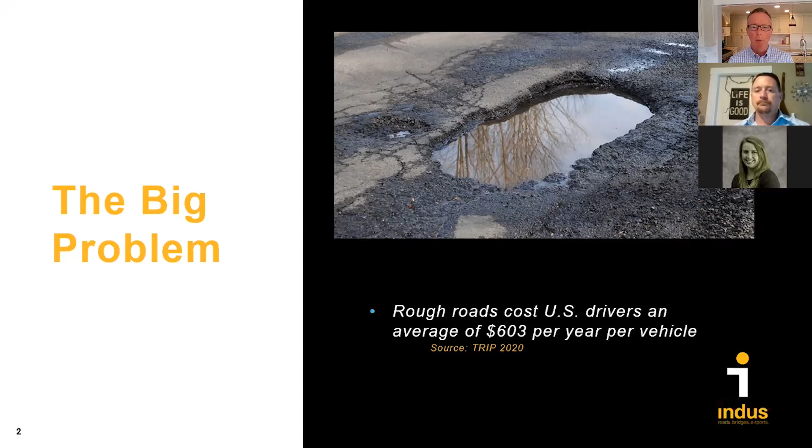We want to focus on solutions. We truly believe that cold in place recycling is a great solution to cost effectively address many of our poor roads. In fact, if you were to ask me for a 1-sentence definition of cold in place recycling, I'd say it's a cost effective solution to fix bad roads. That in a nutshell is cold in place recycling. And as we go through the slides today, I think you'll agree with me.

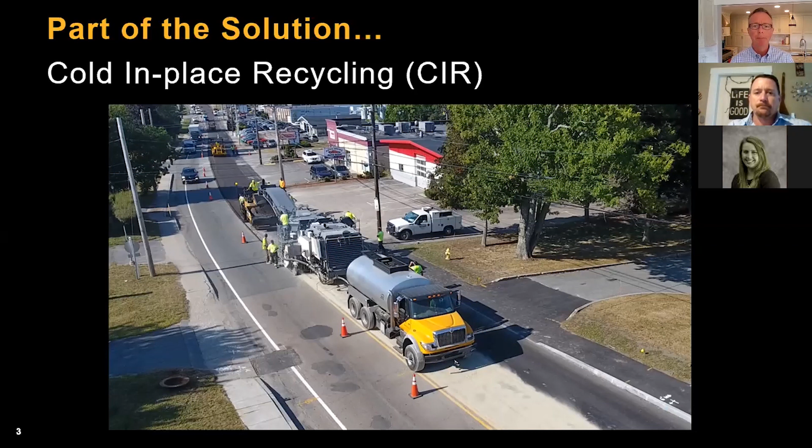So our number 1 goal with this webinar was to answer your questions about cold in place recycling. Our agenda for today is to answer 5 questions that we commonly hear as we travel across the Northeast talking to folks about cold in place recycling. And of course, we want to answer any questions you have over the course of the event as well.

The first question we often hear is, what do you mean when you say CIR with foamed asphalt? What are you talking about? We have a tendency to throw around a lot of technical terminology and acronyms, and sometimes we don't slow down and make sure everybody knows what we mean when we say CIR with foamed asphalt. So we'll start off by answering that question.

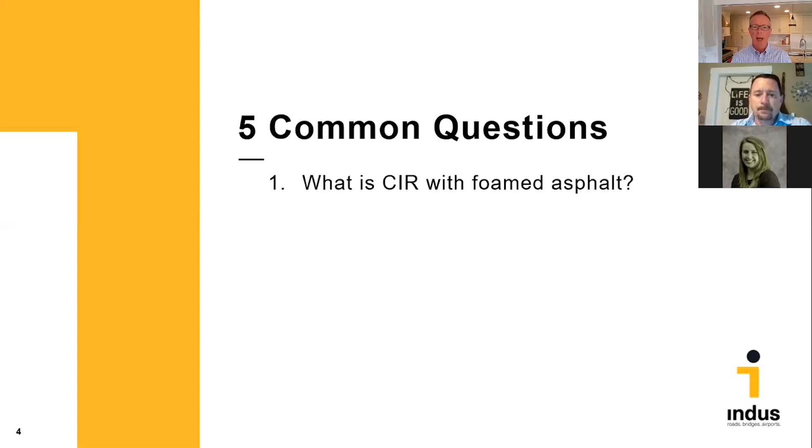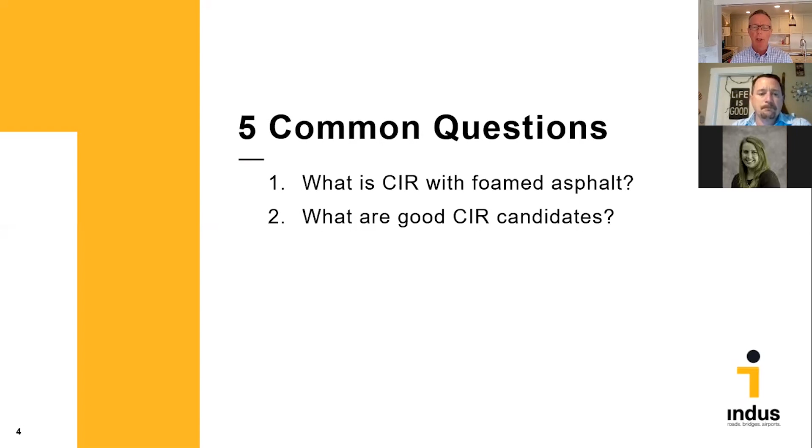Then we'll look at some roads and talk about where the CIR process is best used. We've all heard the saying, right road, right treatment for the right road at the right time. We want you to know what the right roads are for CIR.

The third question we'll answer is how do we take those old, aged pavements that are falling apart and strengthen and stabilize them. We're going to talk about the stabilization agents we use in the process and how we determine how much of those agents to put in during the process.

The fourth question we'll address is we'll take you step by step through a project, almost like you were building it in your community, what we do when we start the project and how it gets finished up.

Then we'll take a break from answering questions to introduce one of Art's clients, Fran Kane from out in Westfield, Mass. The town of Westfield has now done 3 cold-in-place recycling projects with us, totaling 7.5 miles, as Art mentioned earlier. So we thought it would be helpful for you to hear directly from a public agency standpoint what their experience has been with the CIR process.

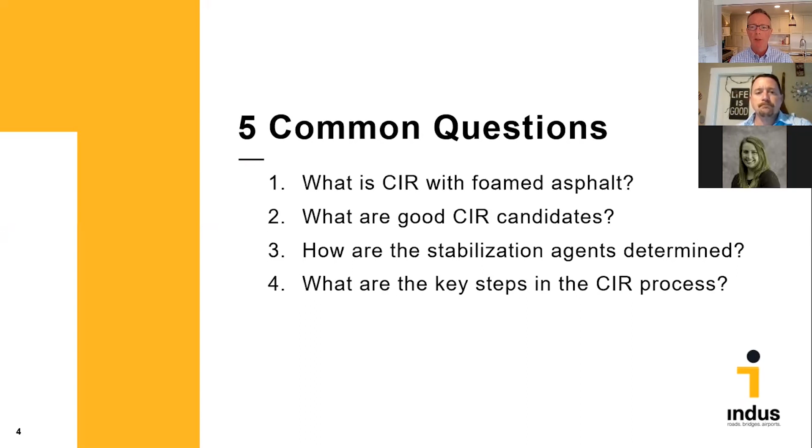And then we'll conclude by looking at the list of what we think are the primary benefits of doing cold-in-place recycling.

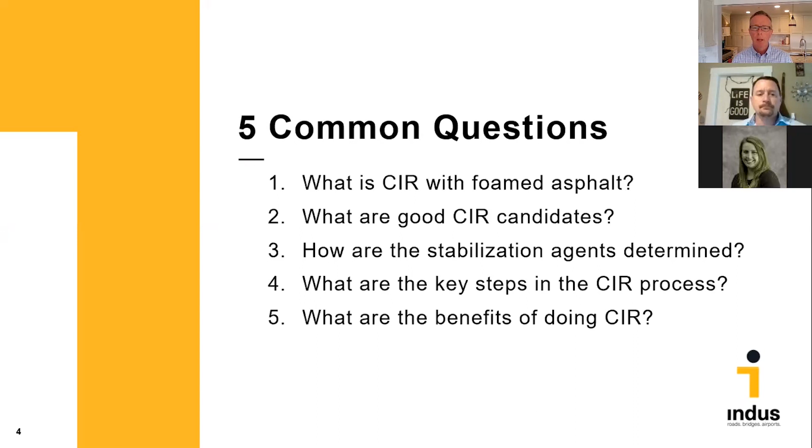So let's first answer this question: what do we mean when we say CIR with foamed asphalt?

Well, essentially, CIR is creating millings, but instead of trucking all those millings away and putting them in a big stockpile someplace, like we often see as we drive through highway projects, we take those millings and add new stabilizing materials to them, then lay them back down on the same pavement, all in one continuous operation.

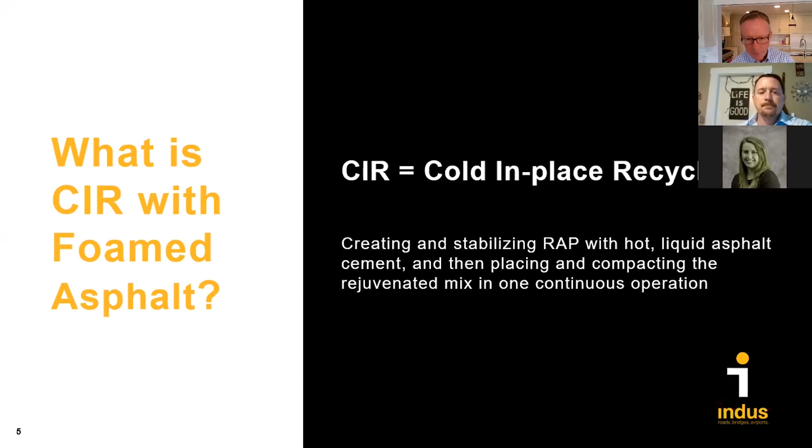The workhorse of the cold-in-place recycling process is this machine here. It's a Wirtgen 3800, and it looks just like any big milling machine you'd see out on a highway project that you're driving through, with 2 key differences.

One is the direction of travel and the drum rotation. If this was a milling job, this machine would be going right to left in this picture, and that conveyor would be feeding trucks to take those millings away and put them in a stockpile someplace. This being a recycling project, the machine's moving left to right, and that means instead of upcutting, like it would in a milling process to get as much material out as quickly as possible, the drum in this machine is downcutting.

And what that does is enable us to size the RAP particles the way we want them sized, definitely much smaller than we want for milling, where we're just trying to get material out as quickly as possible.

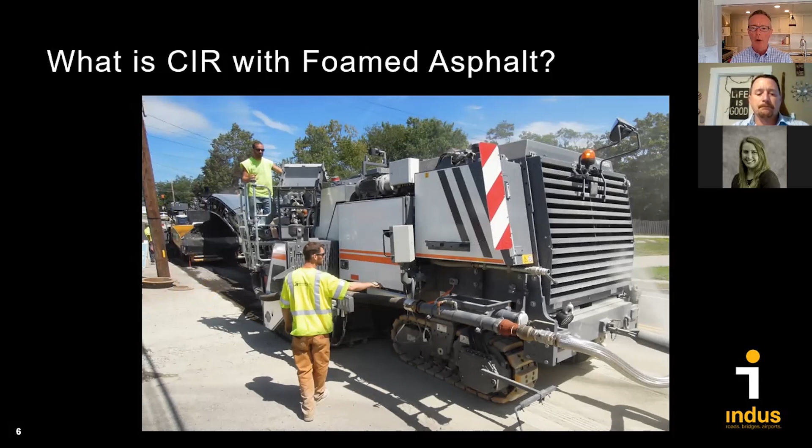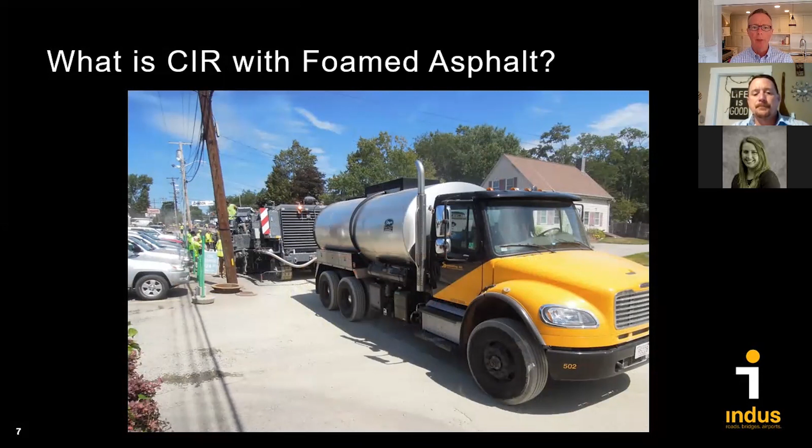The second difference between this operation and the milling operation, you might notice this silver hose connection, probably about a 4-inch diameter hose connected over here in the lower right-hand corner of the photo. That hose is connected to this asphalt tanker. The asphalt tanker contains liquid asphalt binder, a PG64 asphalt binder heated up to 320, 330 degrees Fahrenheit. That liquid asphalt binder is pumped back through that hose connection into the cutter housing on the machine.

This picture on the left-hand side, that's where the cutter housing is located, where the actual milling head is. The milling head is 12.5 feet wide, so what that enables us to do is recycle an entire lane width in one pass, which is very convenient.

And across the width of that milling head, there are 18 of these nozzles that you see in this schematic on the right-hand side. This is where the foaming of the asphalt occurs. We pump in the asphalt, generally about 2 to 2.5% liquid asphalt cement by weight of the RAP we're stabilizing, along with a slight mist of water, maybe 2 to 3% by weight of the liquid asphalt cement.

Just enough to cause it to essentially explode. You know what happens when you put a little bit of water in hot oil in a frying pan? It has a tendency to explode. Well, that's what's happening with these nozzles here, along with a little bit of compressed air. The end result is we take that liquid asphalt and expand its volume in a bubbly form to about 15 times its original size.

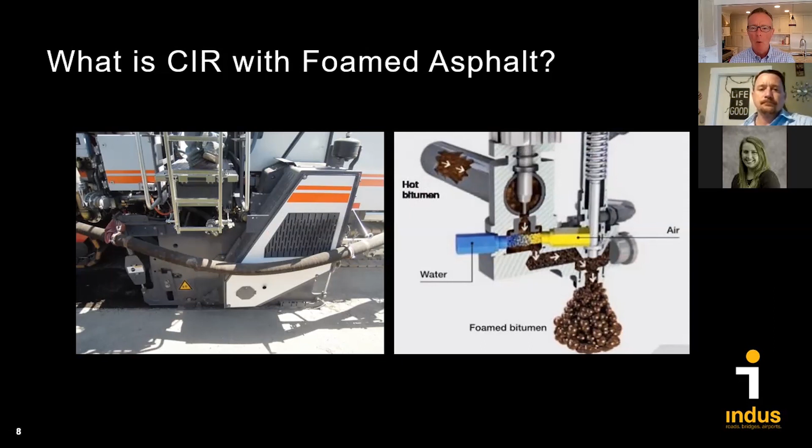So just think about that for a second. If you took a 1-gallon jug or can of liquid asphalt cement and foamed it up, all of a sudden it's like you have 15 gallons of bubbles. Now what all those foamed asphalt bubbles do is grab fine particles from the millings inside the cutter housing and create little mortar balls, if you will, that act as spot welds to stick larger RAP particles together. Think about a mason who takes a trowel full of mortar and uses it to stick 2 bricks or 2 concrete blocks together.

That's what we're doing with this process. We're not trying to continuously coat every aggregate particle like you would with brand new blacktop. We're trying to create these mortar balls to spot weld the larger aggregate together. The big advantage to that is it slows the rate of reflective cracking by not having that continuous coating.

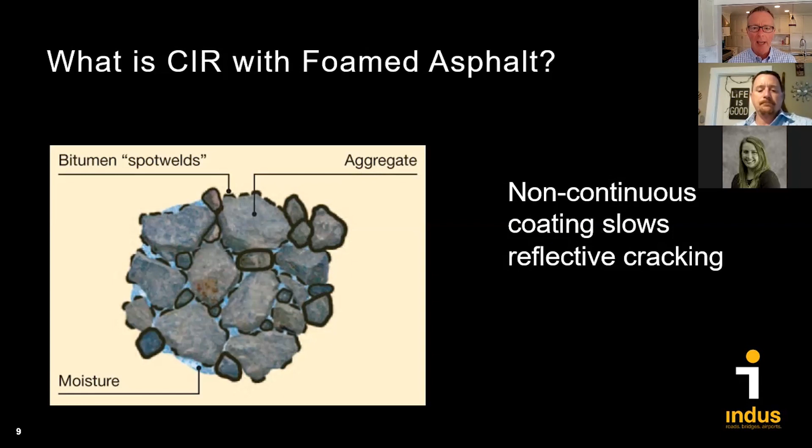As you think about the problem we're always fighting in this climate of ours, it's reflective cracking. Seems like you're always fighting them. So this foamed asphalt process reduces that rate of reflective cracking. The other big advantage is it also allows us to put traffic on it more quickly than other processes. So that's what the foamed asphalt looks like as a close-up of the material being created.

At the end of the day, this is the actual CIR layer that we're building on the job. This layer was about 4.5 inches thick, and it was created on Pond Street in Braintree, about a half mile or so down the road from our office. That was the first job that we ever did. We did it back in August of 2017. This chunk of material was taken from the road when we were raising all the utility structures back to grade after recycling.

We'll explain that to you later on. But when I saw the chunks of material being removed to raise those castings back to grade, I said, hey, there's no better way to explain to people what CIR with foamed asphalt is than to show them a chunk of that material right there. Very solid, very stable, a real long-lasting and durable type repair.

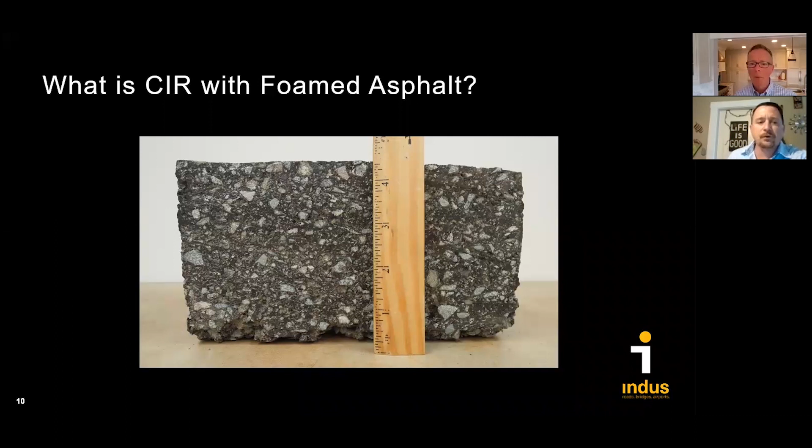So what kind of roads is this CIR process used on? Probably the best way to answer that is in two ways. Let's first look at the asphalt deterioration curve. You've all seen this or some variation of it before. You know that we're typically out advocating for keeping good roads in good condition with preventive maintenance treatments, the ones shown at the top of this curve. The reason we advocate for those is simple: as a pavement manager, those are your best bang for your buck. It costs way less to maintain a network over time if you keep the good roads good and aren't spending all your money fixing bad roads.

But at the same time, we're realists and we understand every community has at least a few bad roads. As we thought about how we could serve our clients better, we looked for opportunities at the bottom half of the curve. When I'm talking about the bottom half, I'm really talking about this range between mill and overlay and hot mix shims and overlays down to full depth reclamation and reconstruction. You can see there's a big gap in the types of roads that would either get mill and fill, overlays, or full depth reclamation.

I mentioned earlier that I'd spent 10 years of my career as a public works director in New York, and every year I probably did, I don't know, 4 or 5 of these full depth reclamation jobs.

And I can tell you the politicians and the residents all loved them. We'd take the worst roads in town, full depth reclaim them, pave them, and we were all done. Everybody was happy, ribbon cuttings and smiles all around.

Really just two big problems with those type projects. One was the impact on through traffic and the abutting residents. Typically we'd have to shut the roads down for large parts of the project, and we'd have a lot of issues with small, lower-slung cars getting out of adjacent driveways when we were doing the reclaim process itself.

And the second big problem we experienced was paying for them. This was 20, 25 years ago when I was doing these jobs. I typically did stabilized FDR—I figured I had the road torn up, I might as well put either some emulsion, some Portland cement, or some foamed asphalt. In fact, the last of the jobs I did were mostly all foamed asphalt back in the late 90s. I might as well put that in then instead of having to rebuild the road sooner because it wasn't strong enough. But in today's dollars, those type projects are probably 30 or 35 bucks a square yard, so writing the checks was pretty painful.

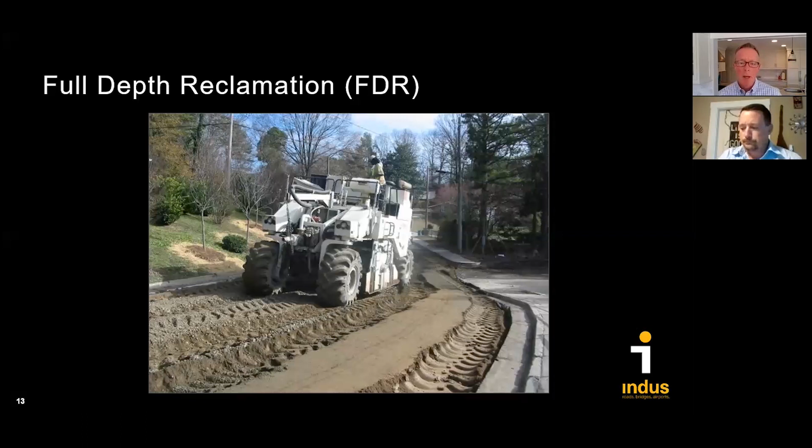I'm not sure that's the best solution there. In fact, I'm pretty sure it's not. That might give you a 5-6 year service life, but I think we all know that most of those cracks are going to reflect right through that thin overlay pretty quickly.

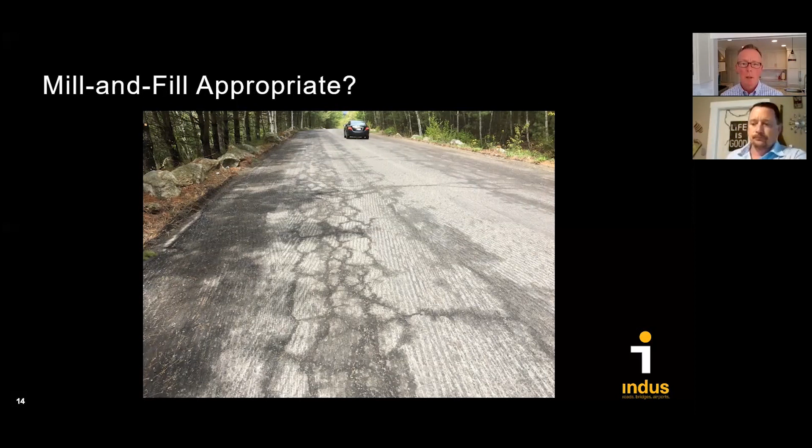This is a picture sent to me just last week. Same thing—probably the community didn't want to spend the money rebuilding the road, so they're putting what I would call a Band-Aid repair on, a thin mill and fill, when the road is really just too far deteriorated.

So we're not going to get the service life out of that mill and fill treatment that we used to get. When I started as a director back in the early 90s, it was pretty common to get 15 years out of a mill and fill—that was kind of the standard answer. But I can guarantee you, with today's asphalt quality, which is not as good as it used to be 20, 30 years ago, combined with our candidate selection, this road right here is not going to last 15 years.

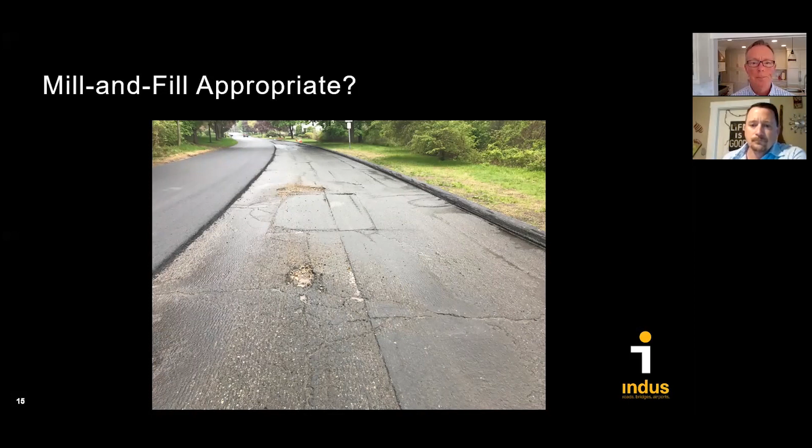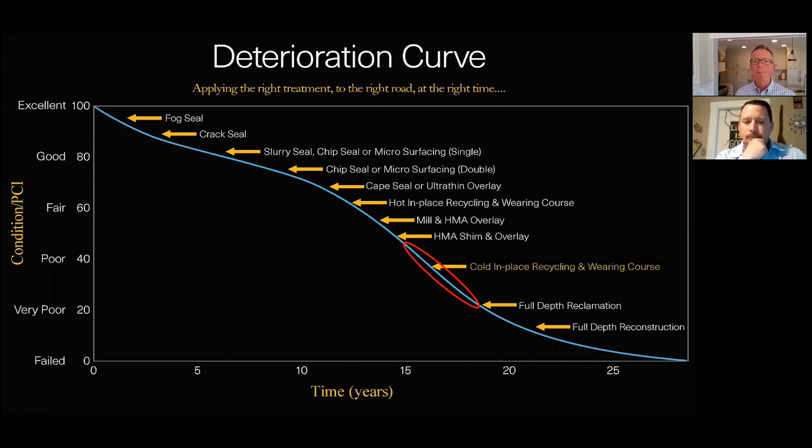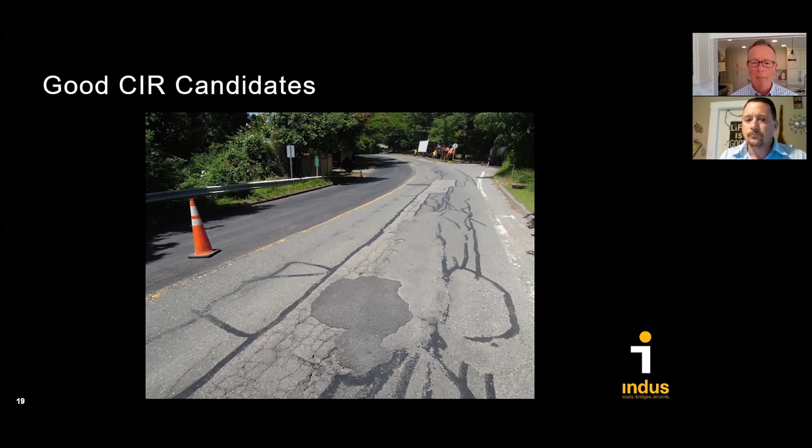And here's a job that we did in early 2018, for the Massachusetts DOT north of Boston in Manchester-by-the-Sea. A lot of pavement managers will look at that existing pavement—the left lane, as we look at this picture, was already recycled, and the right lane is still to be done. I think a lot of pavement managers would look at that and say, oh, that's an FDR road. And that's exactly what we want people to understand today: you don't always need to do FDR to a bad road. This was a perfect cold in place recycling candidate, at probably half the cost of FDR.

Dan, can I interrupt you for one minute? We've had several questions come in. Yeah, fire away. So the first one was, what is the foamed asphalt made of? I think you might have come on a little bit late.

We covered that a little bit at the beginning, but let's talk about the difference between foamed asphalt and emulsion. Foamed asphalt is just asphalt, except we mix in 2 or 3% water and a little bit of compressed air to get that foaming action that allows us to create those mortar balls and bind the large particles together. So it's almost 100% asphalt cement. Emulsion, on the other hand, most emulsions are about 2/3 asphalt cement, 1/3 water.

So when you think about stabilizing a 3 to 5 inch thick layer of CIR, that's the typical depth of the process, then you've got as much as 5 inches of material with a bunch of water in it. It's got to cure out before you put the wearing course on. Well, that's one of the reasons why we've gone the foamed asphalt route.

Great. And the next question kind of goes into that. They're wondering, do you need to top the CIR immediately? And if not, how long do you wait before doing so? I think that's good timing for that question, because it's different between the emulsion and the foamed asphalt process.

It is, yeah. Every cold in place recycling job, whether you use emulsion or foamed asphalt, needs a wearing course, because that wearing course is going to seal out the moisture from getting in and degrading that recycled material. This recycled material has a relatively high air content - I think it's about 10 to 12% air voids in a typical CIR mix. So it could be susceptible to moisture damage if we didn't seal it up. So every job gets a wearing course.

So what are good CIR candidates? The first thing we always want to make sure we do is go out and verify that we have enough thickness of existing asphalt. As I just mentioned, most CIR jobs get recycled to a depth of anywhere between 3 and 5 inches. So you want to have as an absolute minimum about 3 inches, preferably 4 or 5 inches to do a CIR job.

But we have found a workaround, and that's if you have either a thin section of pavement on a roadway or the entire road is thin, you can do one of two things. You can add RAP - I know some communities are sitting on big stockpiles of RAP, so we can process that and spread a layer ahead of the recycler and blend it in with the existing pavement to make the final product thicker. Or you can add new virgin aggregate. Art actually had experience doing that on one of his jobs, so I'll let him share that experience with you.

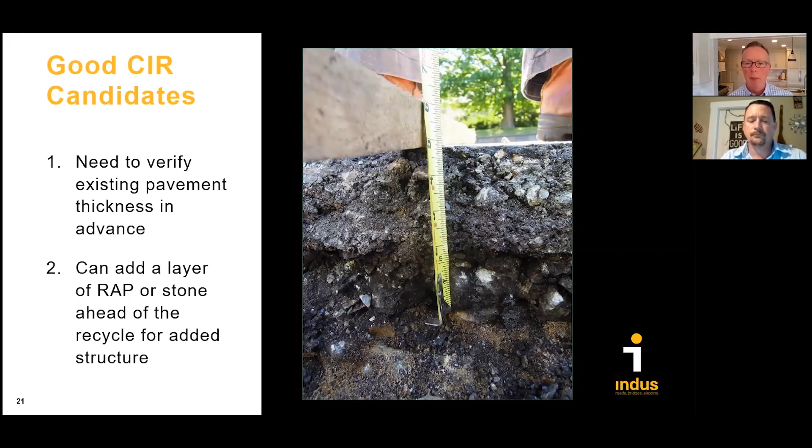Yes, so we had a unique experience down in Westfield, and when I introduced Fran at the end of the presentation, he'll talk a little bit more about it.

But we had on Shaker Road in Westfield, a 2.2 mile section of road, and the middle 2,000 feet of this road only showed 2 inches of asphalt in the cores, where the remainder of the road was 6 to 8 inches. So in that 2-inch section, we had to do another set of cores, another mix design. With the stone, we added a layer of 3/4 inch stone that was recycled in with the existing RAP, and of course the new liquid asphalt and the new Portland cement, to fit in with the rest of the road.

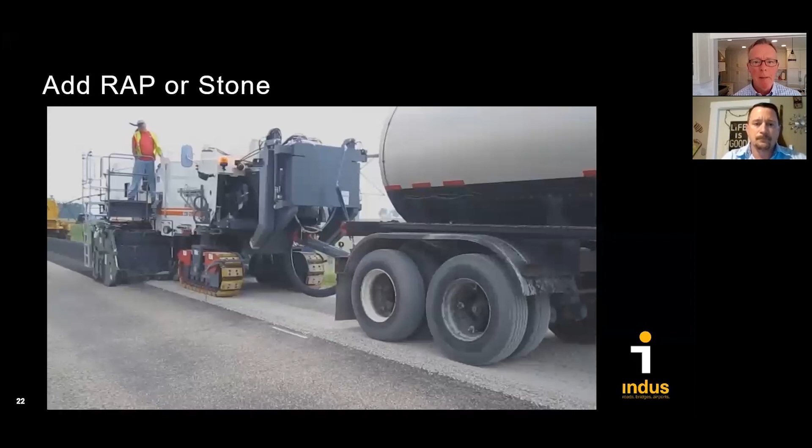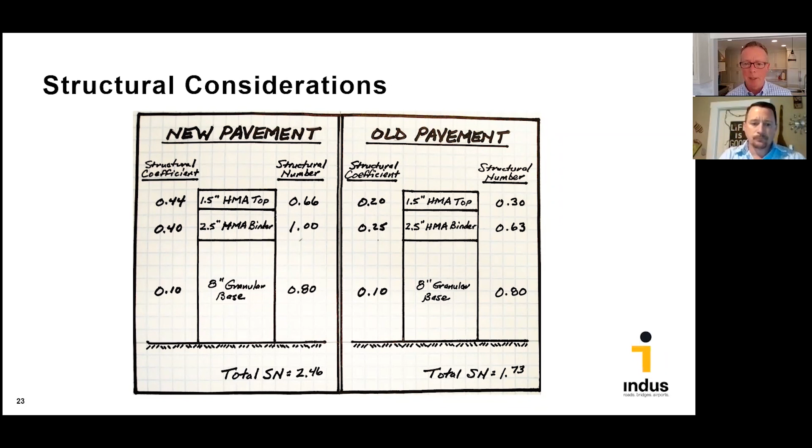Most engineers estimate it goes down to the range of 0.20 on the surface, where it's getting the most exposure to ultraviolet, down to 0.25. And that might take 20 years, 15 years, 25 years, some long period of time, but the road does get weaker. For this example, you can see it got about 30% weaker.

And if you want to learn more about the structural coefficients, you can find those on roadresource.org, a new website. On that website, there's a thing called the structural calculator, and you can compare different road rehabilitation options and what their structural capacity might be.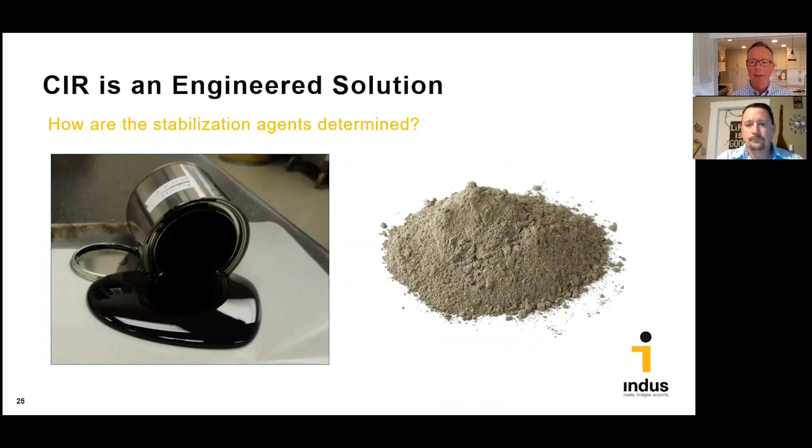Well, what we do is we go out and we extensively core every road that we're going to do. We core it end to end and side to side, getting cores from the middle, from the edges. We want to have a comprehensive understanding of the existing pavement thickness so we can work with a client on agreeing on an appropriate recycle thickness and also an appropriate overlay wearing course option.

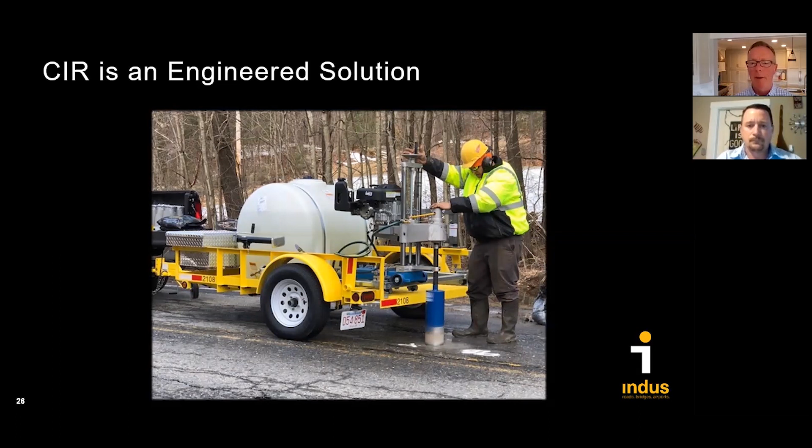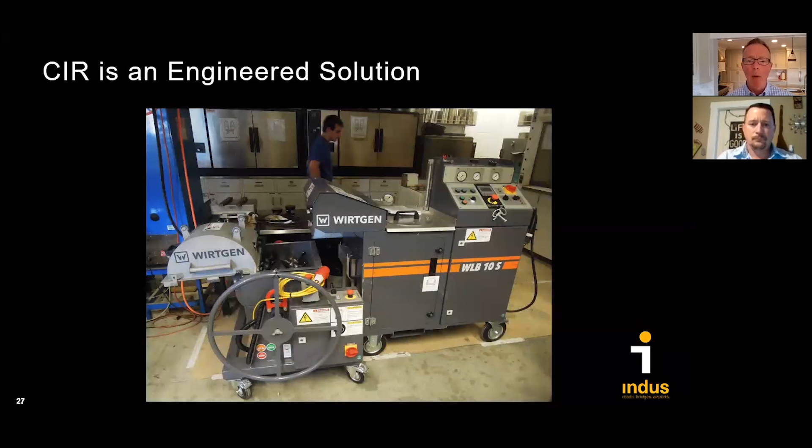In the middle of this machine, where that black handle is, on top of the silver lid, that's where they put the asphalt cement, and they experiment with some different asphalt temperatures, liquid asphalt temperatures, different amounts of foaming water to get the optimum temperature and foaming water amounts. On the left is a hopper with some blades in it, and that replicates the cutter housing on the recycling machine.

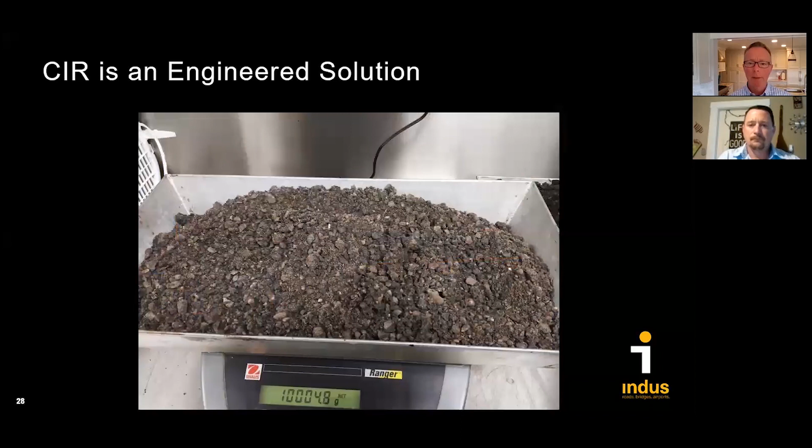So they take those cores that we ship to them and they grind them up in the lab and produce millings to the same sort of gradation as what the milling machine we use in the field uses. You can see in this case they've got about a 10,000 gram sample of those millings. They put them in that hopper, and add the Portland cement, about 1% by weight, to that.

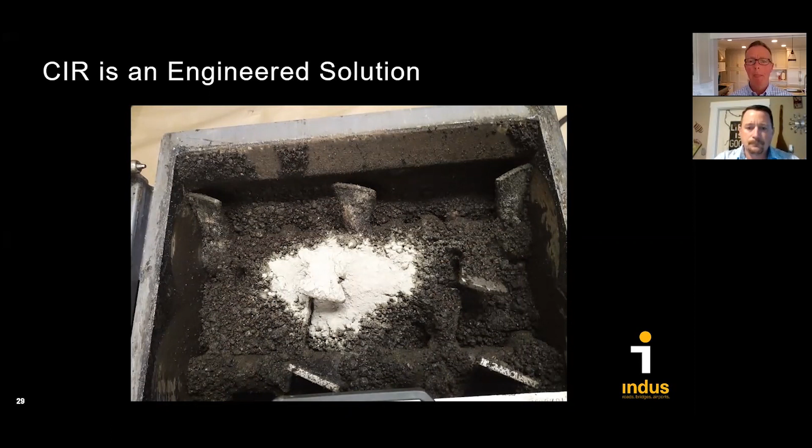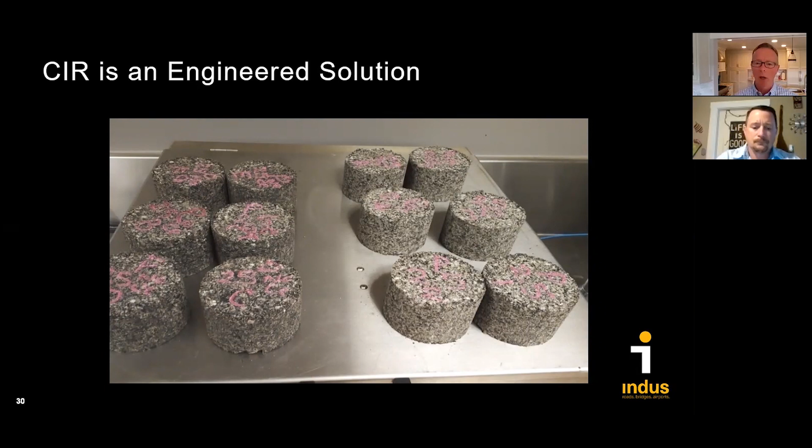They shoot in the foamed asphalt from the center portion of that lab machine, and they create this series of testing plugs, if you will. They do different asphalt contents, usually 3, sometimes 4 different asphalt contents to see which asphalt content works the best. They put these plugs in a curing oven, and they stay in there for 3 days, 72 hours.

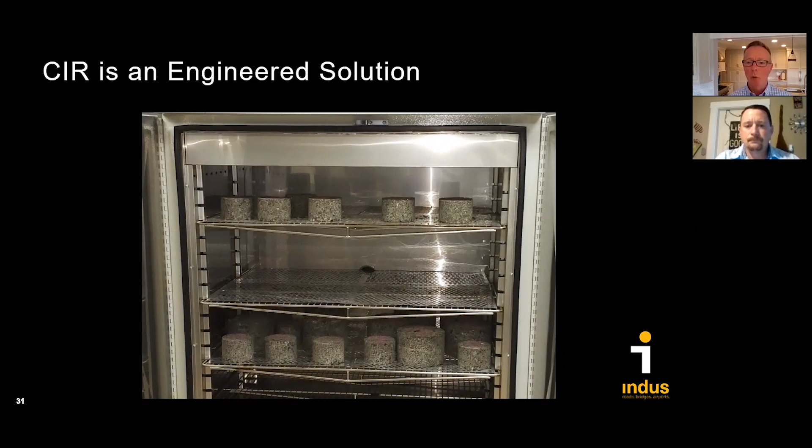They come out, half of the plugs get soaked in water for 24 hours. And then all the plugs get broken by this machine. It's called an indirect tensile strength machine, or ITS machine. And they determine at what strength the material breaks.

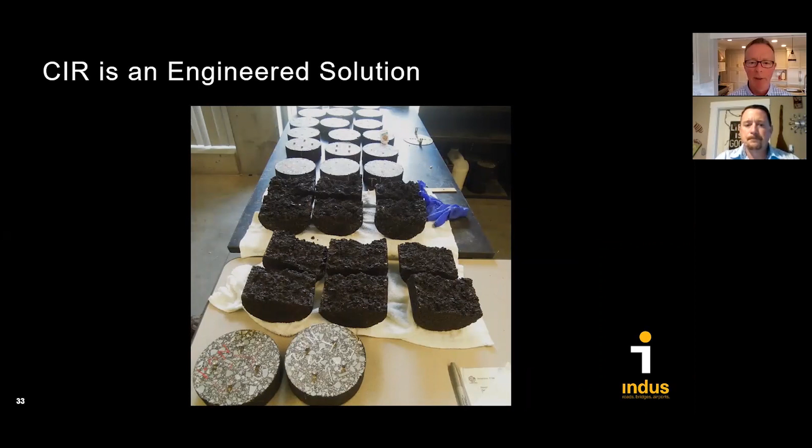There's certainly such a thing as putting too much asphalt cement into a mix. You'll see it start to become unstable and want to move around. So we're looking for the best combination of strengths and stability.

And these minimums came out of a Wisconsin DOT spec. That's the spec that we're using in this area, and that's the spec that Massachusetts DOT has decided to adopt. The reason we chose to use it, and Mass DOT decided to use it as well, is Wisconsin DOT has been doing foamed asphalt CIR for about 10 years now, I think, very successfully. We figured they're a harsh, wet freeze climate, kind of like we are here in the Northeast, so it would be a good spec to start with, and it served us well.

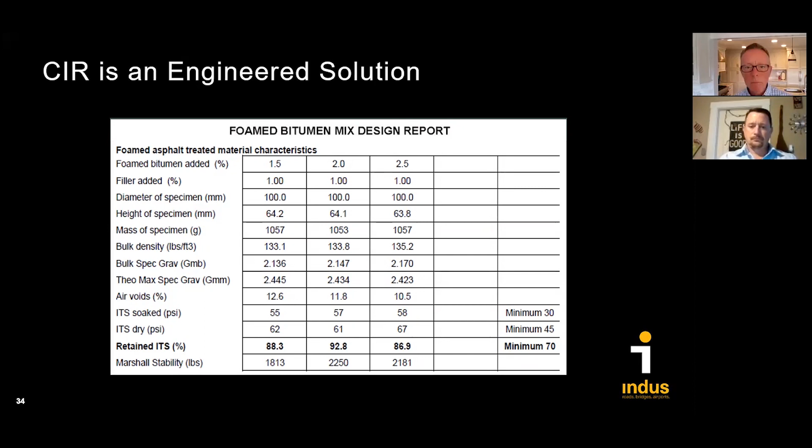So now I'd like to just take you real quickly, unless there's another question or two that would be appropriate to answer, Art.

There's several questions here, but you're really going to get to most of them before the end of the show. So I think I'll just save the ones that you don't answer, and we'll do them at the end. Good, thank you.

So what we'd like to do is just really quickly, without embellishing a lot of the details, take you step by step through how a cold-in-place recycling job gets built so you understand it.

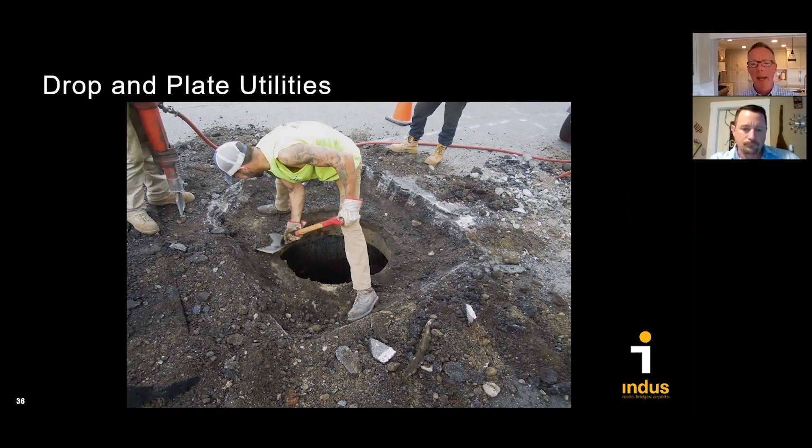The first thing that we do is we go out and we drop and plate all of the existing utilities: manholes, catch basins, we drop water valve gate boxes, gas gate boxes. We drop and plate those down below the depth of the recycle.

When we first started looking at the process, we said, geez, that's going to add a lot of project cost, having to drop and plate and then rebuild all those structures. Maybe we can figure out a recycling process to come along with a milling drum, and then raise it and go over each of these structures. But as we thought about that, we said, you know, most of those 15, 20-year-old structures are already in bad shape anyways. So go out and do a beautiful recycling job and leave those old beat up structure tops in place probably doesn't make a lot of sense.

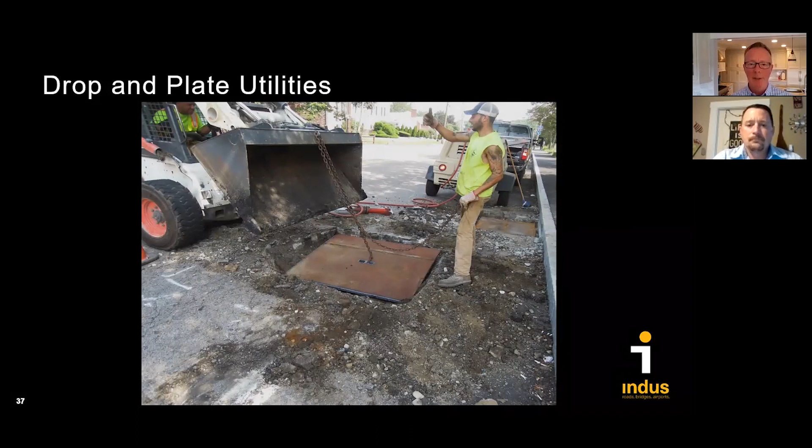So we've chosen to drop and plate. And sure enough, as we're out there adjusting these utilities, we usually find a lot of ugly ones. And what would be the first thing to go on a mill and fill job or a recycle job would be, in many cases, those areas around those utilities that didn't get rebuilt.

So after we have the utilities all dropped and plated, on some jobs we'll have to pre-mill. This job here was the Massachusetts DOT job in Manchester by the Sea.

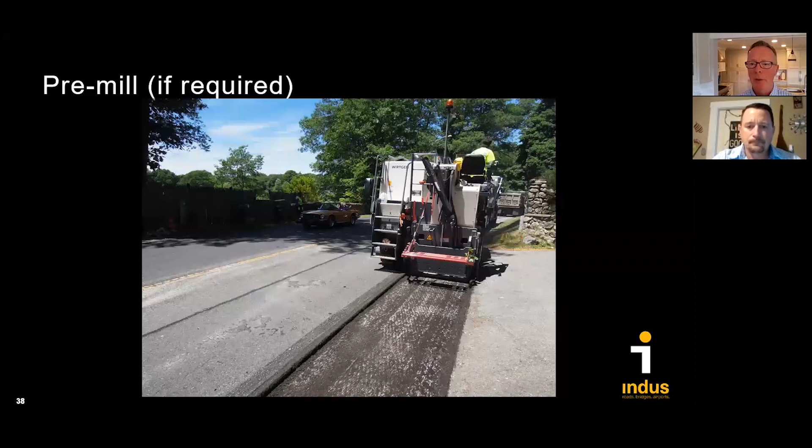Their goal was to apply a 1.25 inch thick hot mix overlay to the recycle job when we were done, and match up all the existing driveways. You can see this driveway on the right here, and side roads. So what that requires is removing some material ahead of recycle, and that's what this mill is doing here. The smaller milling machine has a 4-foot wide cutter head. We do the math to figure out how much material has to be removed.

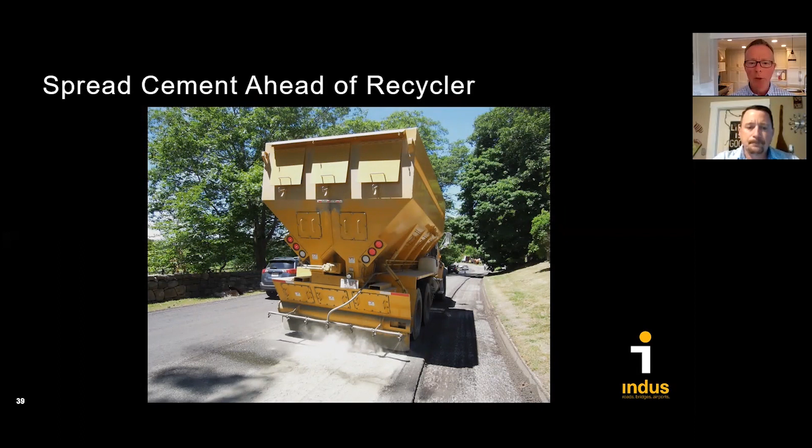We go out ahead of the recycler, taking material away so that we can match up the grades we need to match. Following the pre-milling operation, most of our jobs require 1% Portland cement as part of the mix design. Right behind the pre-mill is this cement spreader truck, putting down generally about 1 pound per square yard of Portland cement for every inch of recycled thickness.

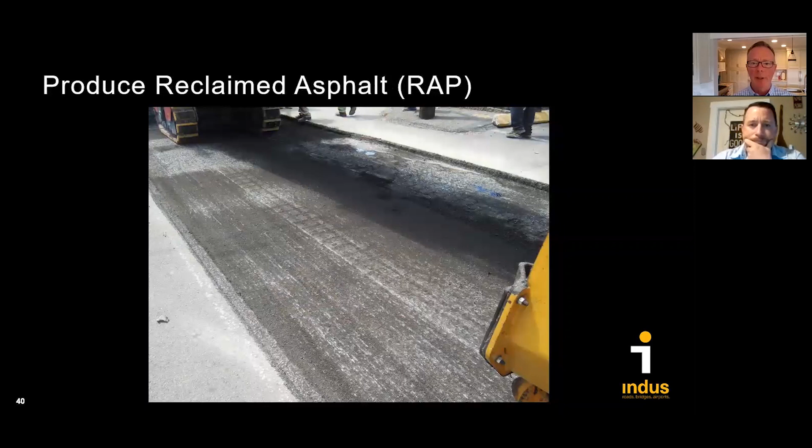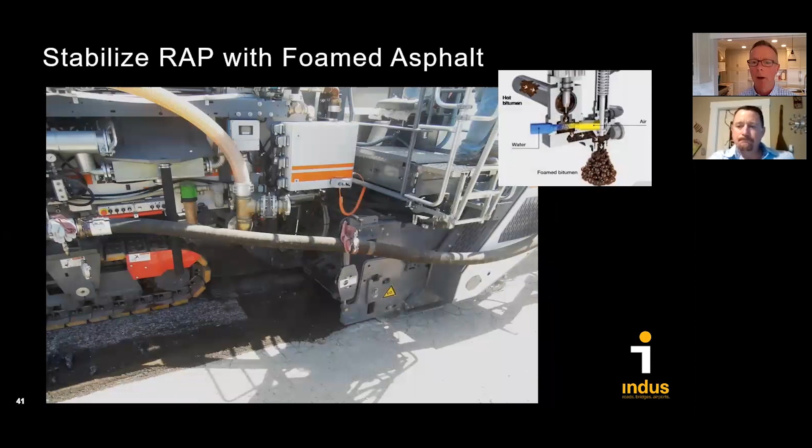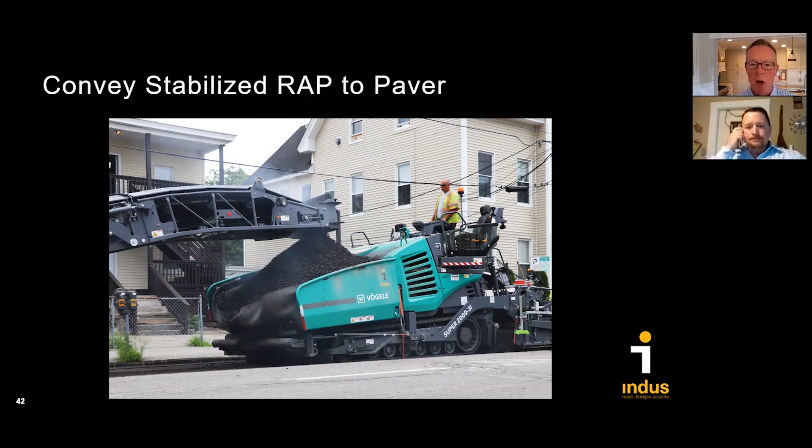After that, it looks almost like any other paving job. Here's what the mat looks like behind the paver. And here's a close-up of that mat.

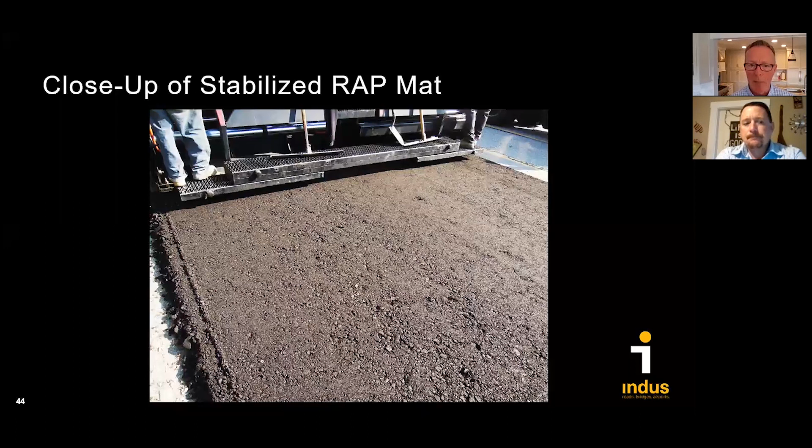I mentioned earlier, the foamed asphalt doesn't provide a continuous total encapsulation or coating. So sometimes you'll go on a job and it'll look almost too dry, like there's not enough asphalt cement in it, and you see uncoated particles, but that's how it's supposed to look. That's the whole spot-welded, non-continuous coating concept — almost like a dry binder mix is what it typically looks like behind the paver screed.

And then it's all about compaction. I mentioned earlier, most jobs are in the 3-inch to 5-inch thick range, so you've got to have some real good compaction to make sure we get good densities of that layer thickness. The first roller on the job is this HAMM 120i roller, which has about a 14-ton static rating. It stays pretty close behind the screed of the paver.

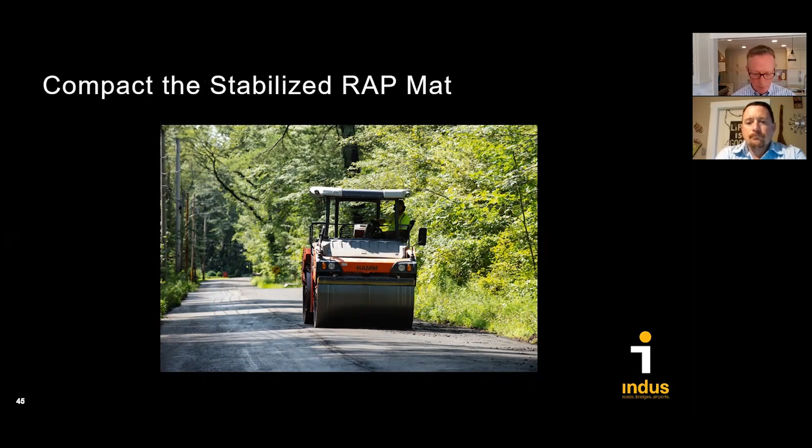And a kind of unique roller we use on our jobs is this Sakai. It's unique because it's rubber tired, as you see, but it's also vibratory. In full vibe mode, it's applying a static equivalent pressure of 27 tons of compaction, so that allows us to really get good, deep, thorough compaction of these 3 to 5-inch recycle layers.

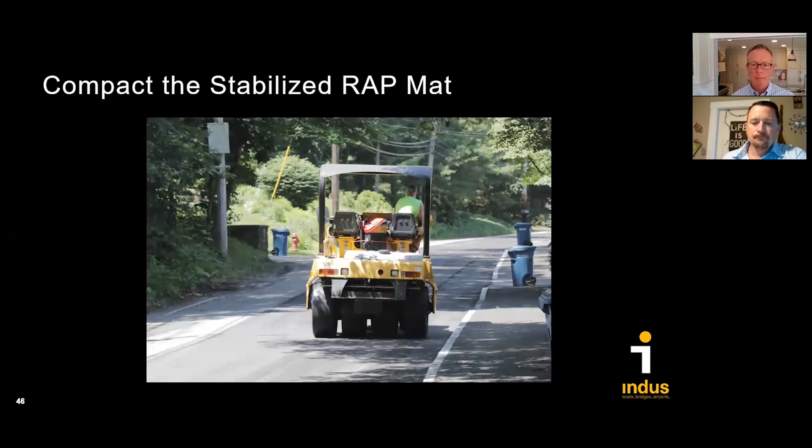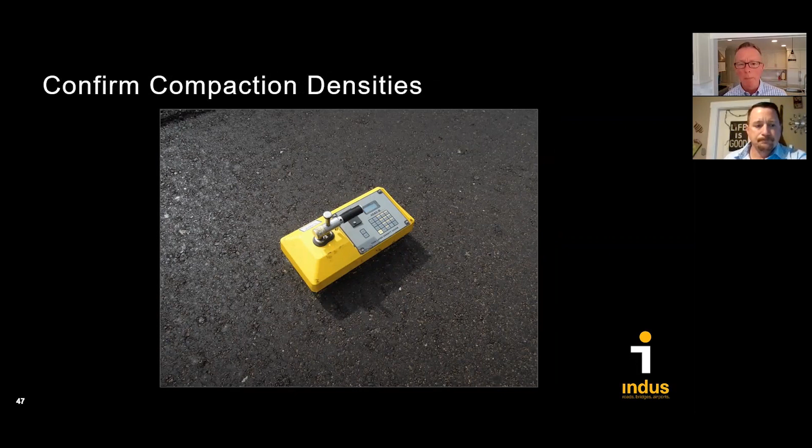On every job, we have one of the local testing labs send us out a technician to work with our roller operators on the rolling patterns and checking densities. So we're doing that all day long.

And once we have proper densities, the next step in the process is to put a fog seal on top before we restore traffic. The fog seal achieves two things: one, it keeps traffic from picking the fines out of the mix once it starts running on the recycled mat; and second, it seals up the recycled mat from absorbing water in the interim before it gets the wearing course.

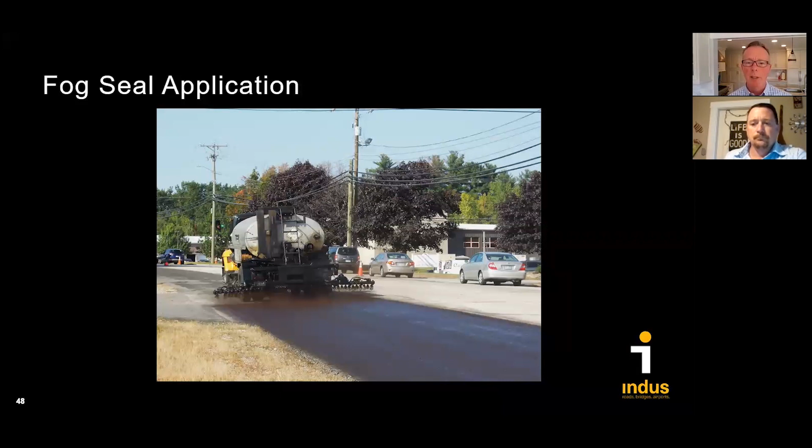Somebody had asked earlier about the timing. Ideally, you'd like to get the wearing course put on within a week or two — that's what we always recommend. Two weeks at the latest, to protect it from traffic and water. But sometimes we've seen jobs go as much as a month without that wearing course, and we don't like it, but it happens sometimes. This fog seal helps to protect that recycled layer from any damage.

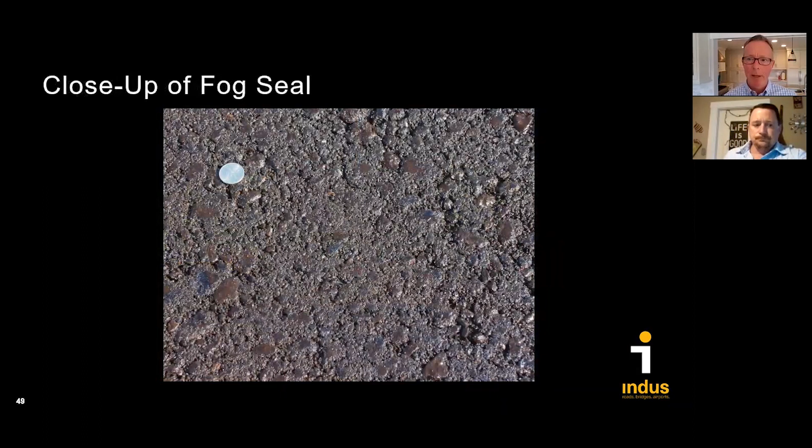Here's what that fog seal looks like close up, almost ready for traffic. And when it is ready for traffic, this is what it looks like.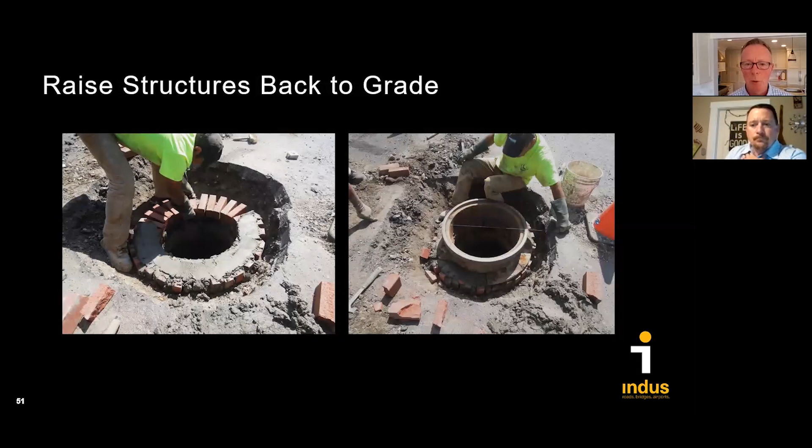So the next stage in the operation, after you see this beautiful recycled job, is we go out and make a big mess in the middle of the road, raising all those manholes, catch basins, and other utility structures back to grade. This particular job was going to get a 1.5 inch hot mix asphalt overlay, so the manhole tops and risers were all being raised to about 1.5 inches above the recycled layer depth. And of course, we compact new asphalt around all those raised structures.

All CIR must receive a wearing course to protect it from moisture intrusion over the long term. There's a wide array of choices on wearing course options, from surface treatments, which some of our clients have used, to different thicknesses of hot mix asphalt. About 3/4 of the jobs we've done have been 1.5 inch hot mix overlays, but we've also done a few with microsurfacing, and a couple of clients have chosen ultra thin hot mix overlays.

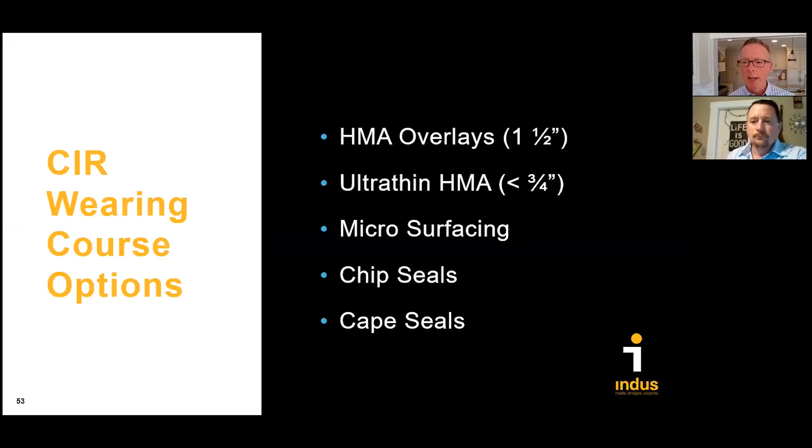Dan, can you talk a little bit about the life cycle depending on what you put on it for a wearing surface? That question has come up in the chat.

We've only been doing cold in place recycling for 3 years, so for me to stand here and say it lasts 15, 20, 10, or 30 years, I can't tell you from our own experience yet. But I've traveled around the country talking with other CIR contractors and agencies who've done CIR, and most people figure the CIR layer itself is good for about 15 years. If you put a thin surface treatment on top, you're not going to get any structural capacity out of that treatment, so I'd call that a 15-year service life, plus or minus. But if you put a 1.5 inch overlay on top of the CIR, I'd feel comfortable putting 20 years on that. I haven't done it for 20 years, so I can't swear on a stack of Bibles, but I feel comfortable making that representation.

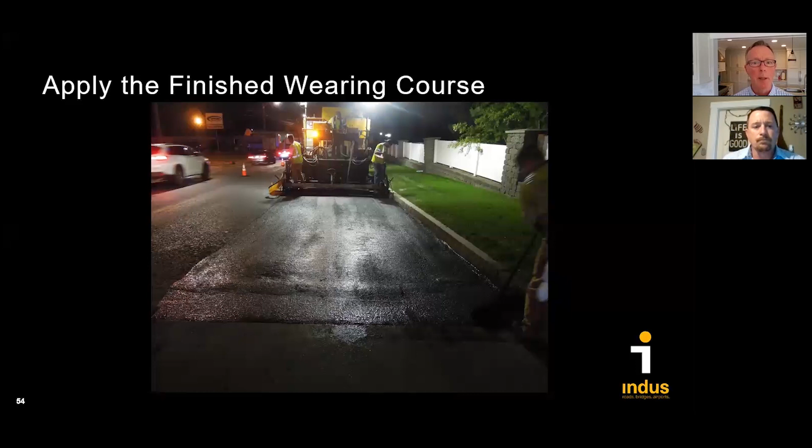Thank you, Dan. This was the first job we did, back in Braintree in August of 2017. The town really wanted to get the bad road fixed. They were getting a lot of complaints on it, but didn't have enough money to do a hot mix overlay on top of the CIR, even though it's about 20,000 ADT. So they asked us to just put a double coat of microsurfacing on, and we did it at night because of the high traffic volumes. That was in 2017, and I think they're planning a 1.5 inch overlay this year over our microsurfacing.

We're fortunate today to have one of those clients with us, Francis Kane from Westfield, Mass. Westfield's done 3 jobs, so Art's going to spend a little time chatting with Fran Kane about their experiences with CIR.

Great, thanks Dan. Before I get to Fran, I just want to introduce him and let you know a little bit about his background and history. Fran is a retired Massachusetts National Guard member, and he began work in Westfield in 2003. He was promoted to Deputy Superintendent of Water in 2010, and then most recently, in 2016, became Assistant Director of Public Works. If you don't know Fran, when you see him come online here, you may recognize the face, because I call him the face of Westfield, especially in the wintertime. The media always seems to interview Fran, and you see him on channel 22 and 40, etc.

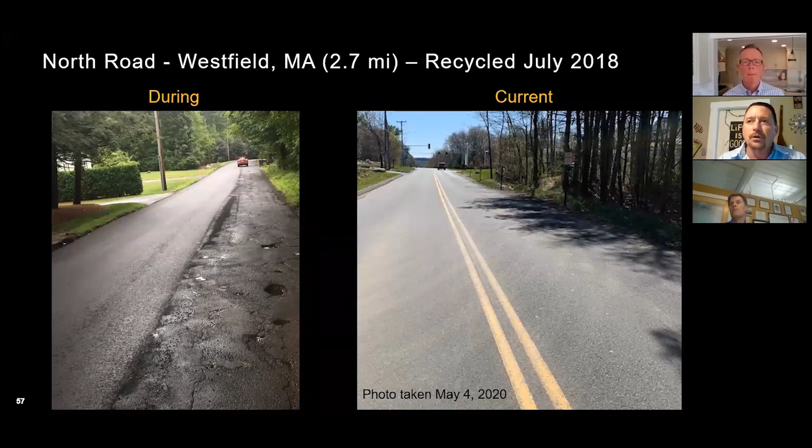Other than, in some ways, similar conditions, I guess, but certainly we needed to add that material, where the core samples - which are key - showed that it needed to be bolstered up with the added stone.

Actually, one of the questions that was asked, I can answer now about elevation and grade differences. Obviously in this section, we did actually raise the elevation of the road. It's a rural section, so we had the ability to raise a section of the road.

If we couldn't raise the road because of curbing or things like that, we do pre-milling - I think Dan might have already mentioned it - ahead of the operation to maintain those existing elevations. Here on this project, we were fortunate enough to be able to raise the elevation of the road, so it worked out well.

Can you talk about what you were thinking of doing to this road before you considered cold in place? Yeah, I mean, typically that would have more likely been a mill and fill, to be honest with you. It does see a fair amount of traffic, but that's probably how that would have gone, I'm sure.

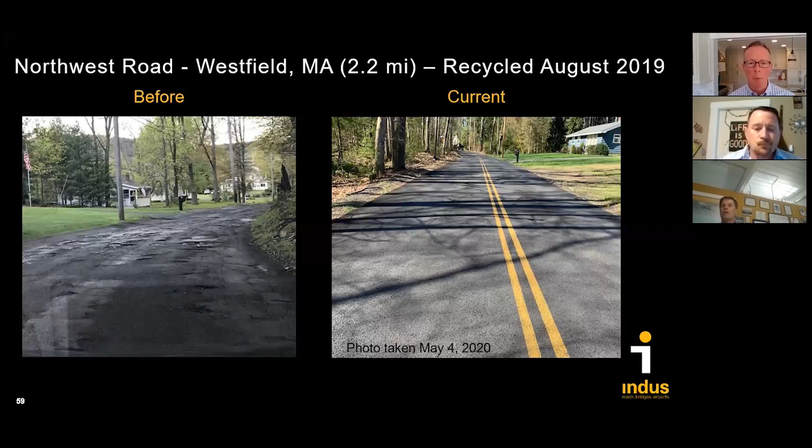So I'd like to close out today by talking about some of the reasons why we think you might want to consider adding CIR with foamed asphalt to your pavement management programs.

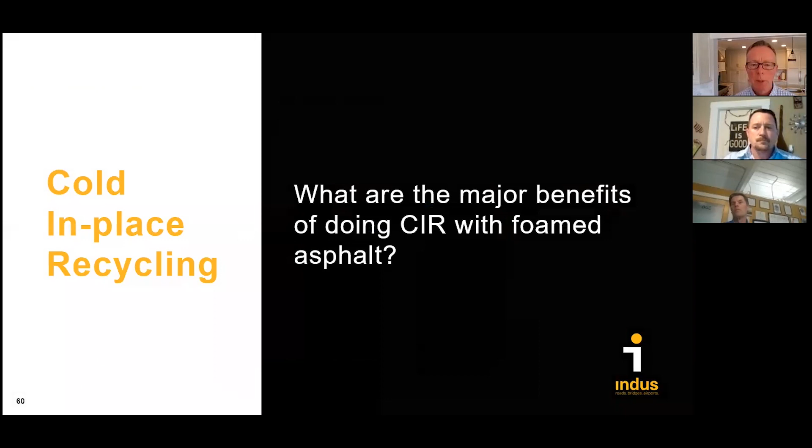The first reason is that it creates a very durable process. We talked about service lives earlier, and the slow rate of reflective cracking. At the end of the day, we know we can't take beat up, bad roads and fix them with mill and fill. We can fix them for a year, 2 years, maybe 5 years, but to spend all that money on that short-term solution is not the right thing to do.

So if we need something more durable, we don't always have to default to FDR. We can use CIR, as you saw in some of those pictures from Westfield and other jobs we've done.

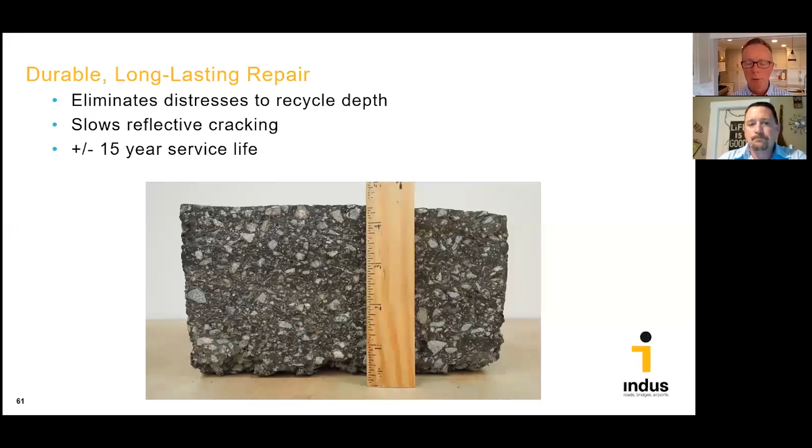The second big reason, getting bigger all the time, is disruption. You know what it's like when you disrupt the residents and motorists—I've been there, I know people squawk. Everybody wants the roads fixed, but nobody wants any inconvenience whatsoever.

So this particular job was one we did in 2018 in Milford, Mass—this is Medway Road. If any of you are familiar with Medway Road, it's right off Interstate 495. It was about a mile long, a very busy commercial corridor, four lanes wide. We were in and out of this job—dropping structures, plating them, recycling, and raising those structures back to grade—in a little over a week.

I don't know how long it took the hot mix paving contractor to come in and overlay—they did that for the town, not for us on that job—but probably within 2 to 3 weeks at the most, the entire job was done. If that had been a reconstruction job, we know what a nightmare it would have been for the people who use this road and the adjacent businesses. It was a very quick process, much less disruptive than other alternatives, even less disruptive than milling and paving. And milling and paving, unless we went really deep, wouldn't have been enough—it would have been a short-term fix.

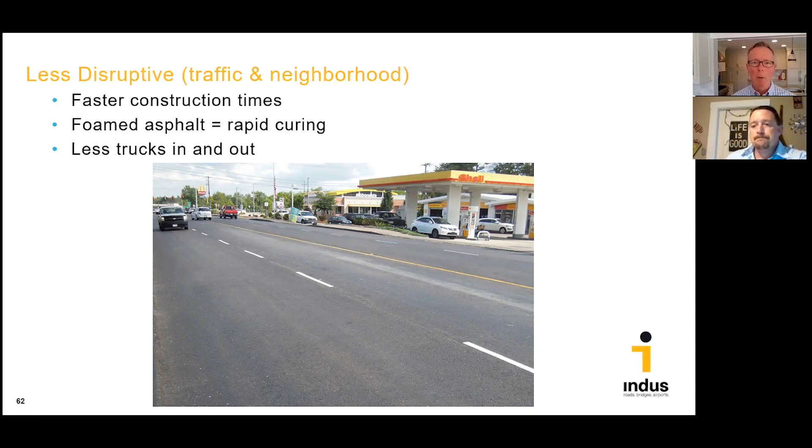We talked about the green benefits. We're hearing more and more about it every year—communities and elected officials committing to reduce their community's carbon footprint.

Another helpful tool on that website I mentioned earlier, roadresource.org, is what they call a sustainability calculator. You can use it to compare two side-by-side rehabilitation options, or really any two roadway treatment options, and it'll show you not only the cost comparison, but also the greenhouse gas emissions between those. Depending on what you're comparing it against, CIR can reduce greenhouse gas emissions by up to 90%. More and more people care about that, so it's a nice selling point for you in your community to explain why you chose this process.

The number one thing I hear when I talk to public works directors is they don't have enough money to do everything they want to do. That's why we have these bad roads to begin with - it's not because we haven't wanted to do our job, it's because we haven't had enough money. That's the number one reason why you should consider CIR, especially as a replacement for FDR where appropriate, where you have a solid subgrade and you're just looking to rehabilitate the beat up layers of pavement.

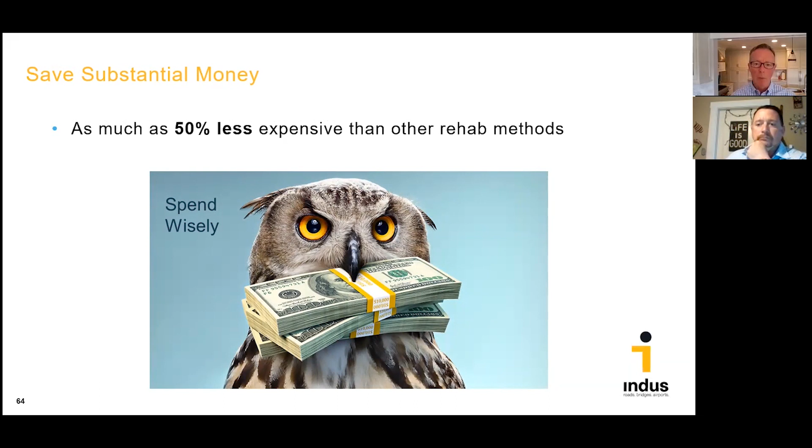So don't always think you need to use FDR for bad roads or a deep mill and fill. This is a very appropriate process, and it's going to save you a ton of money.

So we hope you consider adding the cold in place recycling process to your toolbox. For those that would like to get out and see the process in action, we have 4 jobs coming up in the next month and a half or so. We're going to do 2 jobs for the Massachusetts DOT.

I mentioned earlier they had done a job in Manchester by the Sea back in 2018. They're very happy with the process, as they decided to do 2 with us this year. You can see the first 2 on the list, Revere and Haverhill, with the route names and numbers and the limits of the job. I think we're going to start in Revere on May 18th.

We have to wait until it gets a little warmer. You'd like to have ideally 50, 55 degree ambient and pavement temperatures, and it's supposed to get cold again this weekend, so that might get pushed back a bit. But get in touch with one of us at Indus, and as we get closer to the job, we can firm up that date.

We go from Revere to Haverhill, then we're going back to Milford. I just showed you a picture of Medway Road in Milford that we did back in 2018 - they're doing another project this year, Cedar Street, another very busy road in the community. And then from there, we're headed out to the town of Ludlow to do Fuller Street.

So please, please, please either give us a call, or if you know somebody in those communities, feel free to give them a call, and we'll see if we can host your visit to see the process in person with some proper social distancing.